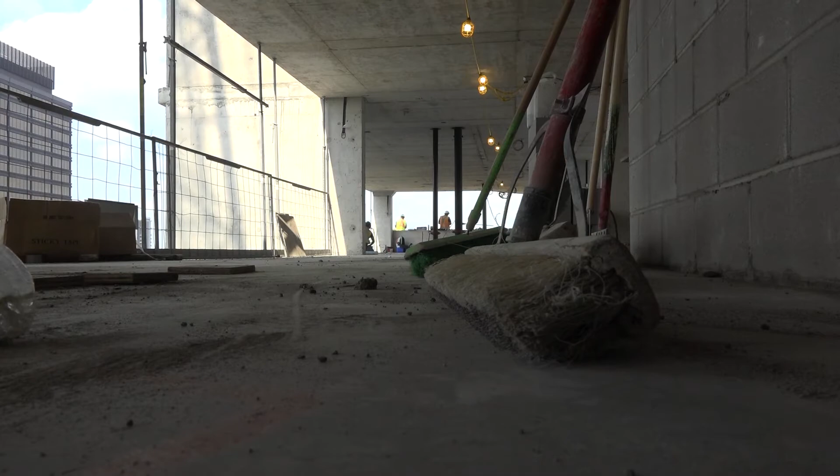Development within the city continues to be supported by the nationally recognized Downtown Secondary Plan, the nearly completed Waterdown Node Secondary Plan, and associated urban design guidelines and secondary dwelling zoning regulations. Staff continue to make remarkable strides in providing clear direction to the development community through the creation of new policy and guidelines. The pace of development in Hamilton continues to exceed expectations and has not slowed even with the challenges of COVID-19. Working together, city staff and the development community have advanced thoughtfully designed sites and buildings.

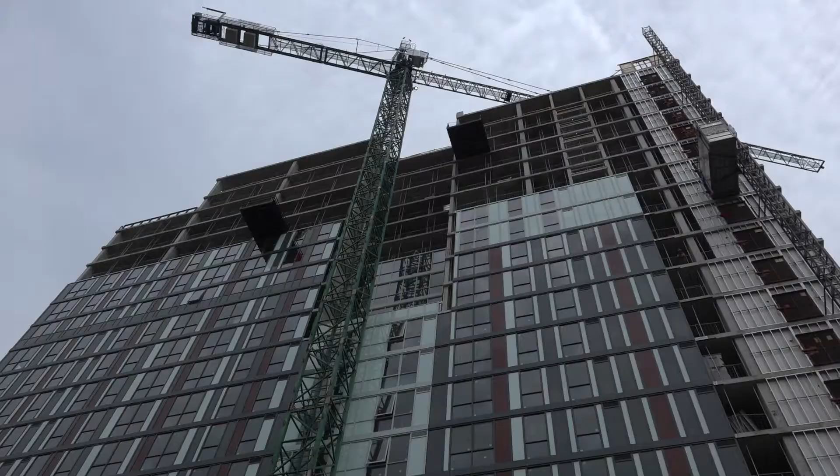The city continues to evolve into the best place to raise a child and age successfully through significant investments in transit, the development of a range of housing options, and the attraction of a variety of employment opportunities.

This is the 9th award ceremony where we continue to celebrate design excellence across the city. The call for submissions opened in the spring of 2021, and we received submissions from owners, developers, builders, architects, landscape architects, planners, and students. The awards have been organized into categories to assist the deliberations of the jury, who were able to shuffle projects around to make sure the submissions were recognized appropriately.

The jury evaluated projects with a focus on several criteria, including contribution to the public realm, success of massing, orientation, scale, materiality, and contextual integration, quality of execution, innovation and uniqueness, energy efficiency, sustainability, adaptability, and resiliency.

The Urban Design and Architecture Awards occur on a biennial basis and are a celebration of design excellence that we celebrate during World Town Planning Week. On this 9th year of awards, 39 submissions were received.

The city's Urban Design and Architecture Awards program is an essential tool that has progressively elevated the status of good design in Hamilton. The design and architecture industry has great importance, as it not only contributes to our economy, but it creates an environment that encourages and inspires others to invest.

Urban design and the quality of life it creates is increasingly becoming an important focus as more people are coming to Hamilton to live, work, learn, and play. I'd like to thank all those who submitted projects this year, and I look forward to how design excellence will continue to shape the City of Hamilton in the future.

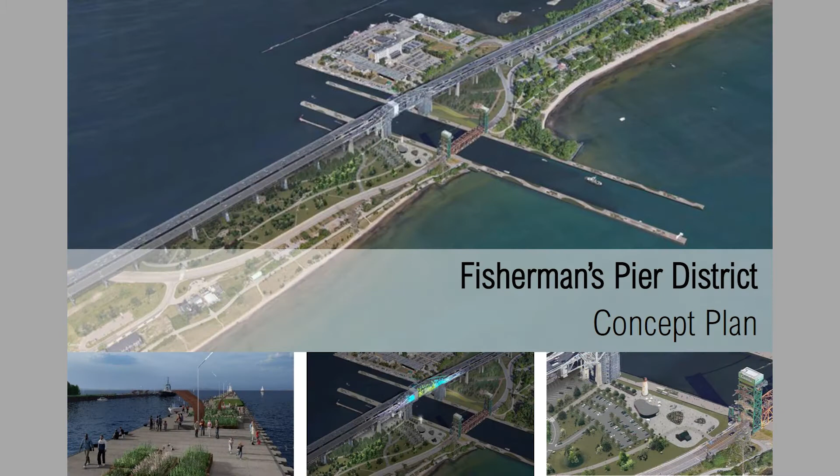Submissions were considered for design expression, material selection, and sustainability objectives. Programmatic intent was also considered, as well as overall contribution to the enhancement of public and pedestrian life in the city of Hamilton. The jury noted a broad range of submissions which speaks to the diversity of the work being promoted by this program.

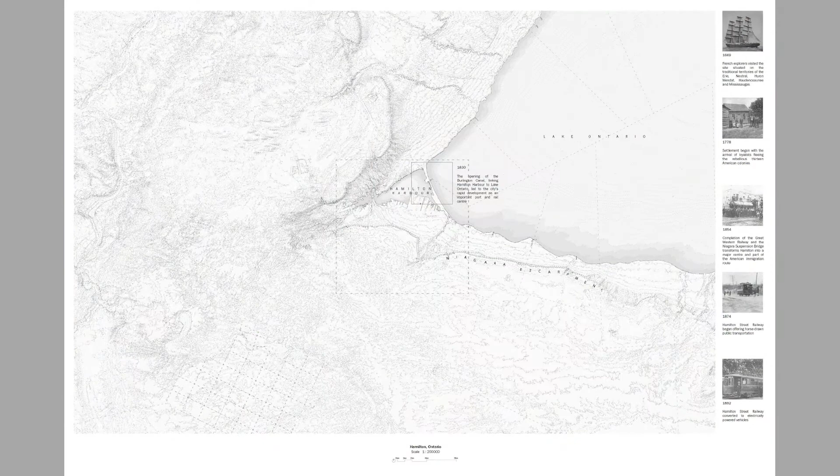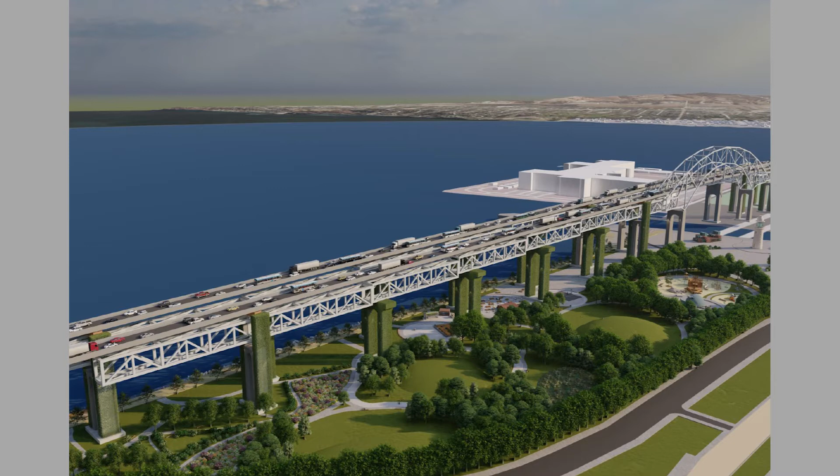The vibrancy of some of the submissions should also be noted. Some were modest and heartwarming submissions, the sorts that change the daily lives of residents in small but incremental ways. There were also larger and more immediately impactful projects - ones that activate an otherwise under-programmed space, that create a destination that fundamentally changes the way people move through and occupy a site.

While several of the entries approached merit and had moments of greatness within them, it occurred to us that some of them could have reached a bit further towards something potentially more aspirational, not just within the project boundaries themselves, but also within the larger community.

We highlight this point to encourage future designers working in the city of Hamilton to not be timid. The time for timidness here is over. Hamilton is a thriving metropolis with cosmopolitan ambitions. This city has extremely strong bones, a good planning structure and design community, and dedicated residents and businesses who would never consider living or working elsewhere. The spirit of future submissions need to channel this strong character.

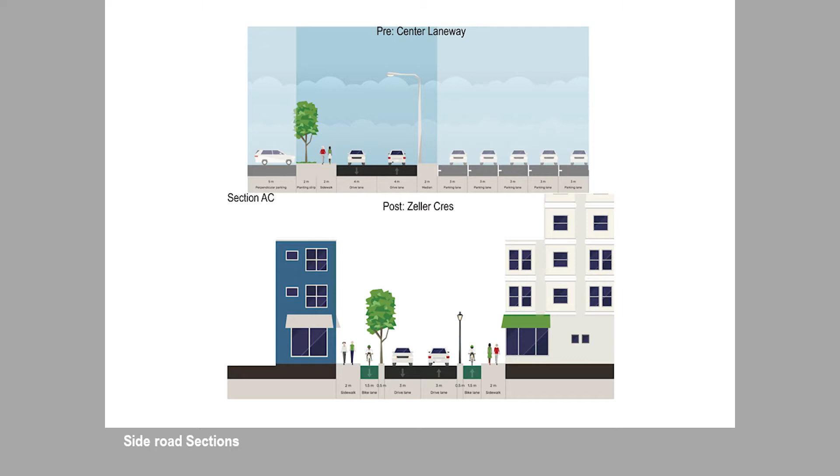Thank you very much to the City of Hamilton for your careful selection of the jury members, to ensure a vibrant and vigorous discussion as we deliberated the submissions. And thank you also to all of our entrants - it is your enthusiasm and extraordinary abilities that made this process so successful this year. Here's to the future of Hamilton.

An Award of Merit for Category 1, Urban Elements, goes to Procession, because the diverse community of Hamilton is represented in the mural. The jury enjoyed the inclusion of the past, present, and future in the imagery. The execution of the mural was professional and comprehensive, integrating urban elements such as the power box as part of the thematic representation. The deployment of the narrative compels the pedestrian to walk the length of the mural to grasp the entirety of the story. Congratulations to the Salvation Army, International Village BIA, Core Urban Inc., and particularly the artist, Lester Coloma, for the mural, Procession, and this Award of Merit.

An Award of Merit for Category 2A, Private Residential Buildings, goes to Connect Communities. There is a satisfying spatial complexity to the design of the shared outdoor landscaped and amenity space. The massing, visible from the street, invites discovery by neighbors. There are good eyes on the street with the design of Connect Communities. The relationship between private balconies and terraces and the public walkways promotes respectable sociability. The detailing of the buildings is suitably robust and maps well to the use of the housing. Congratulations to DPAI Architects for their design of Connect Communities.

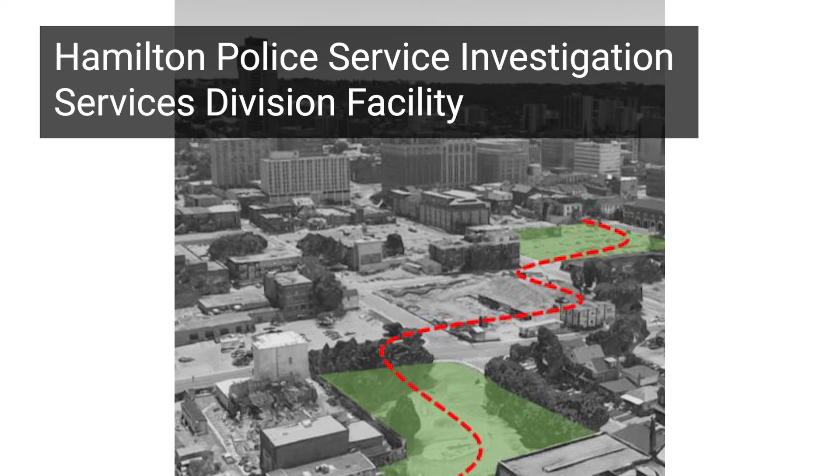An Award of Merit for Category 3, Public Buildings, is awarded to Hamilton Police Service Investigation Services Division Facility. The scale of the mass of the building on the primary and secondary streets is well done. The plaza design mediates the change in elevation between the sidewalk and the front entrance to the building, contributing an appropriately scaled neighborhood gathering place, and the jury hopes it will be a community benefit. Given the nature of the building, the plaza is welcoming. The jury applauds the lack of anti-sitting, anti-skateboarding, or anti-inhabiting elements that could be integrated on the tops of the retaining walls. This is a civic and inclusive gesture and communicates an openness, particularly given the sensitive nature of the building type. Congratulations to Stantec Architects, McLaren, Wilson, Laurie Inc., and the Hamilton Police Services for their contributions to the development of this facility and this Award of Merit.

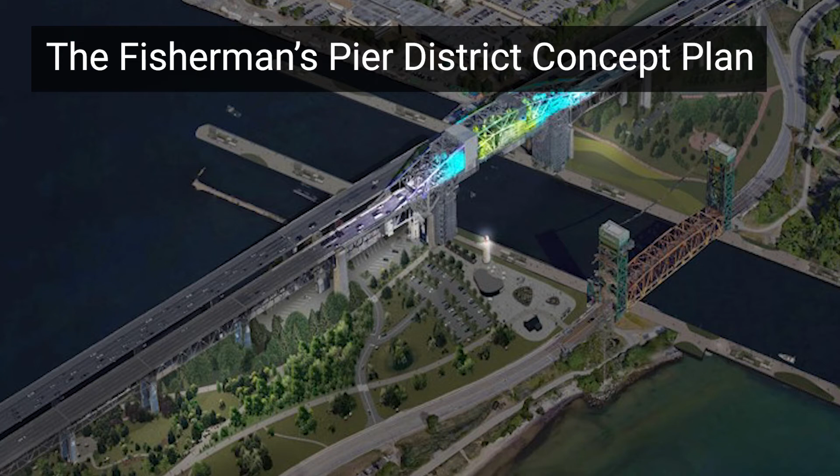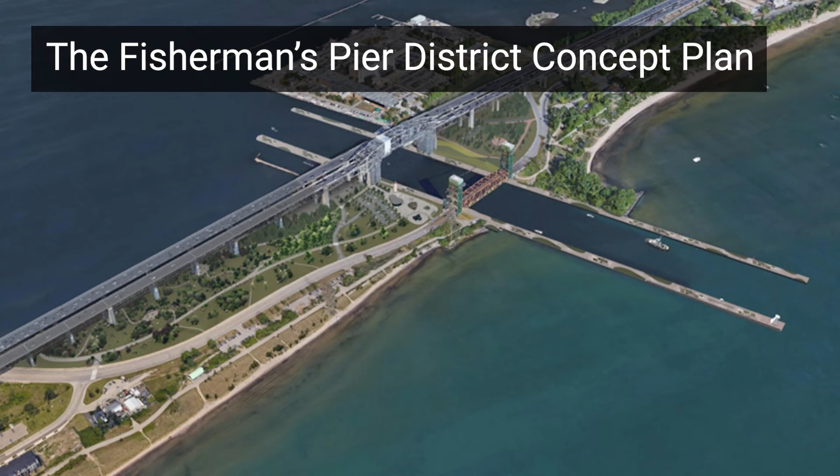An Award of Merit for Category 5, Visions and Master Plans, goes to Fisherman's Pier District Concept. This is a skillful reimagining of an underutilized post-industrial site that is one of the gateway entries to the city. The waterfront location has been maximized to take advantage of existing topographical datums with the design of the circulation, gathering spots, and framed views, and will add a significant new urban park to Hamilton. The designers know the site well, as evidenced by the sensitive integration of industrial artifacts. The soft landscaping indicated in the renderings provide an appropriate range of plant types to offer a range of experiences and a mediation of weather in both summer and winter. Congratulations to Civic Plan, Tom's and McNally Designs, and the Hamilton-Oshawa Port Authority for this vision of what the pier can offer and this award of merit.

An award of merit for Category 6, Civic Achievement, goes to the Ken Soble Building. The tower renewal approach is laudable, and augmenting that strategy of significantly increasing the building performance is praiseworthy. The Passive House certification makes this project civic in nature, proving the viability of this approach and one that Hamilton can use as a demonstration project. The benefit of retaining the existing building means that the city has retained 146 units, offering a larger unit size than what is likely to have been offered had the building been torn down and rebuilt. Congratulations to City Housing Hamilton and ERA Architects for this retrofit of the Ken Soble Tower and this award of merit.

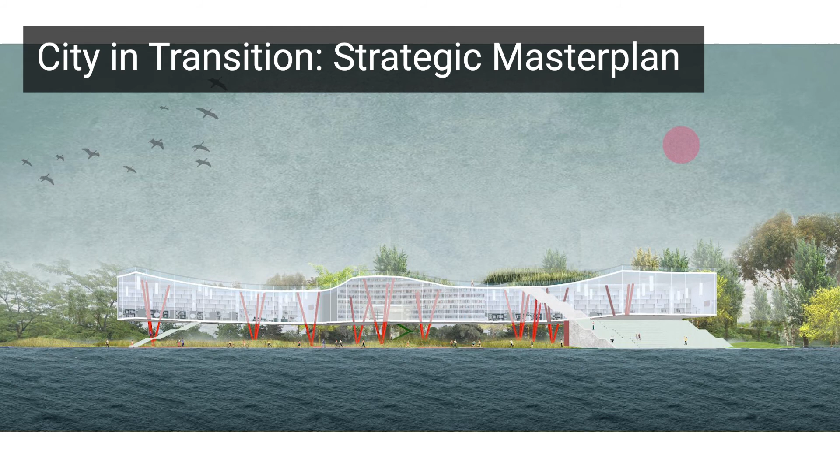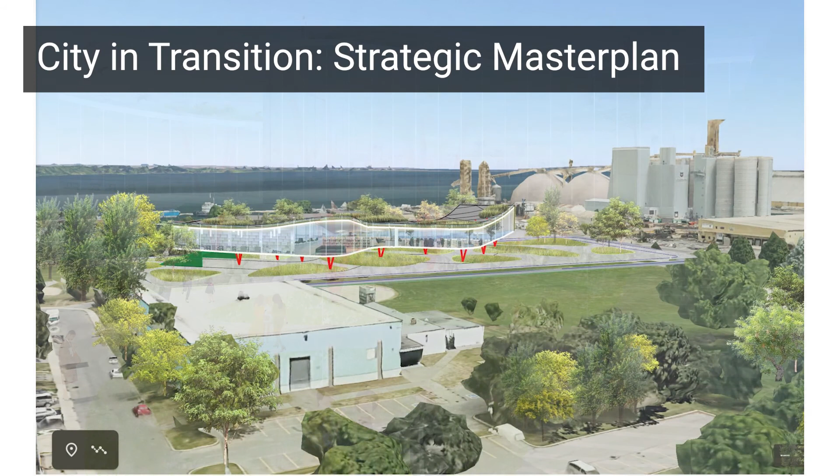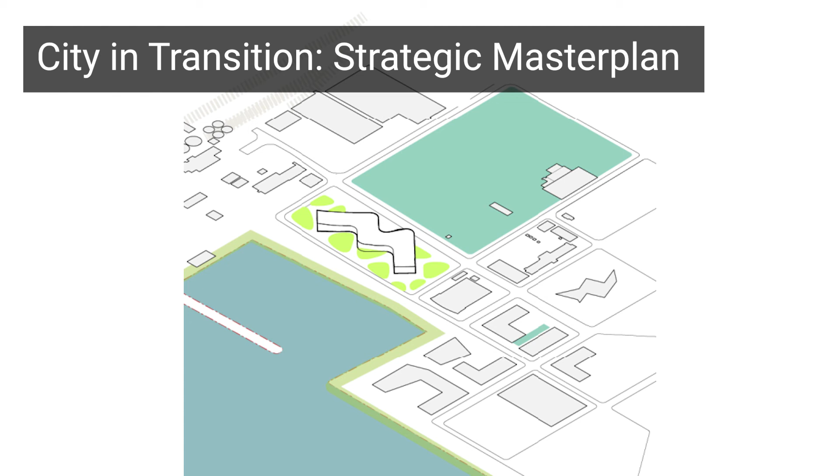An award of merit for Category 7B, Student Projects, Architecture, is awarded to City in Transition, Strategic Master Plan for Hamilton Bayfront Area. The undulating green roof complements the existing topography and adds a playful element. This is an admirable attempt to use the building form to frame views of the harbor. The protruding arms of the W shape are both prows with which to view out and also provide shelter to pedestrians below the building. Congratulations to Yuan Li for this vision of what the Bayfront area can transition into and this award of merit.

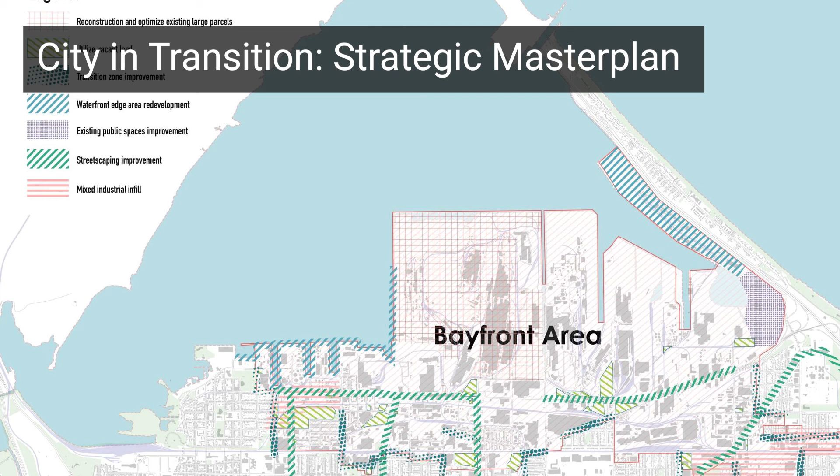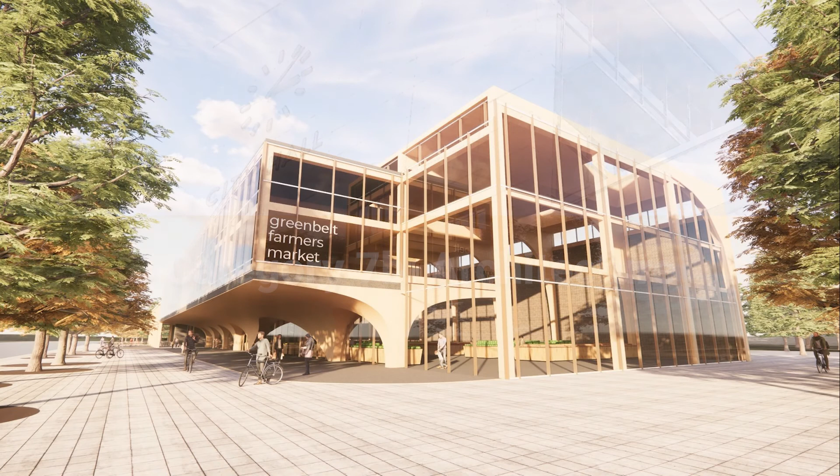An award of excellence for Category 7B, Student Projects Architecture, is awarded to the Greenbelt Farmers Market and Learning Center submission. The form-follows-function drive behind the planning is successful and straightforward, leading to a very logical program deployment and massing. The use of heavy timber and other sustainable materials is a great structural move, complementing the building type. The jury appreciated that a healthy structure is suggested for a local healthy endeavor. Good attention to architectural details like skylights contributes to a great experience. Congratulations to Gabriel Garofalo for this vision of a new attraction to the Stoney Creek area and this award of excellence.